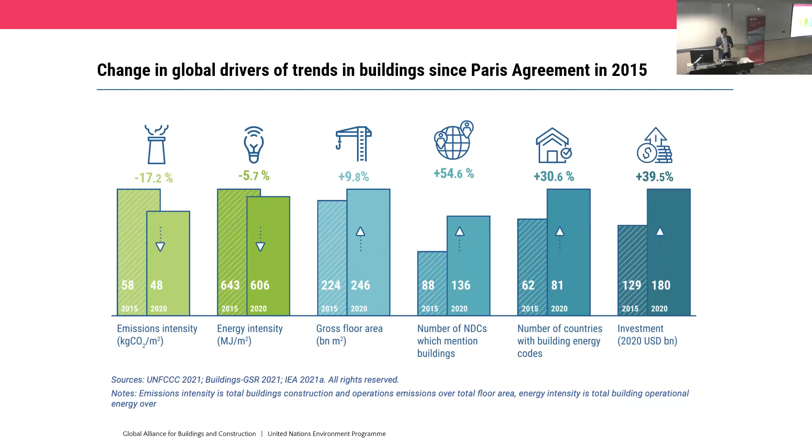We're building more buildings. We continue to see policies relating to building performance and efficiency being instrumented through things like nationally determined contributions, the number of countries with building energy codes, and how we're investing. These are important indicators of interest in ensuring buildings are built to a better standard in the future, but it's nowhere near enough.

The reason buildings are so important is because they comprise probably around 36% or more of the energy use in the world, and around 37% of the emissions. That's a substantial amount that needs to be addressed, both directly through the energy used in the boiler downstairs and the gas emitted, but also in the electricity sector. This is all across the world. That's a major, major challenge.

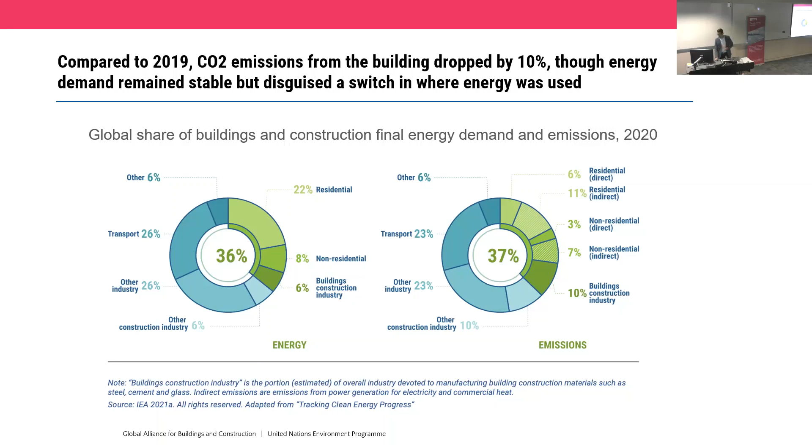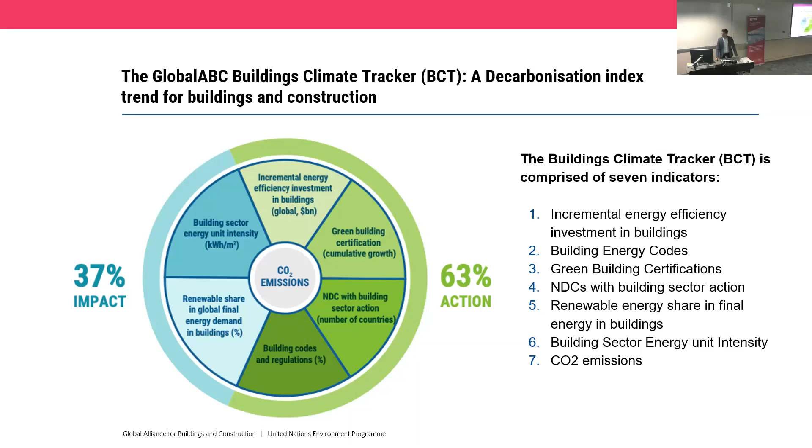When we think about where we need to go, this is really informing the actions we have to be taking around: are we investing enough? Are emissions dropping enough or not at all? Are we building the right type of buildings going forward? This gives an illustration for the last couple of years of how things have been going.

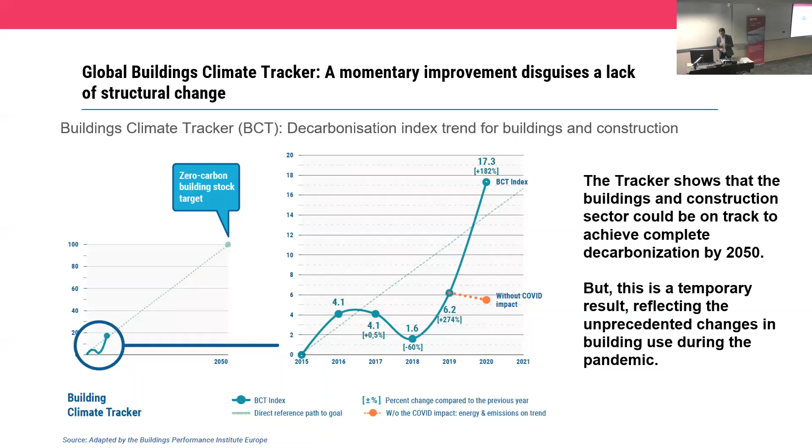So if we're over the line, we're doing on track. If we're below the line, we're not doing so well. And basically, we've not been doing so well. COVID last year, in terms of the indicator, was an anomaly—we probably reduced emissions more quickly than we ever have. It seems unknown at this point whether that curve will be bent down over time, and that's where policy and investments will come in.

When we look at things like building energy codes across the world, which are really critical—I go back to that R2000 home, it's taken the better part of 40 years for that to become the standard code for buildings in Canada. We need to be able to move far more quickly than that. And when you look at how many countries across the world have a mandatory code versus a voluntary code, basically the policies that regulate how we construct, and what we construct, need to move more quickly.

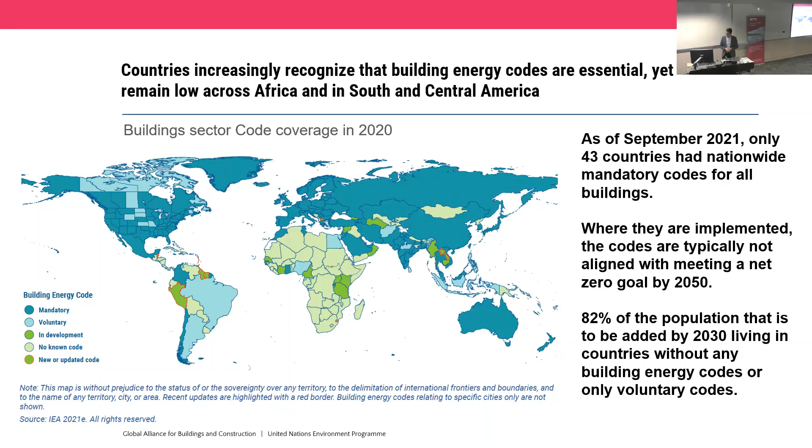None of them are zero energy quite yet. They're headed that way for some few number of countries, but for the most part we're well off track. And if you look forward to estimates of where the world's population will be growing, the reality is much of that will take place in countries with no energy performance code, meaning buildings and their emissions and demands for energy will continue to grow more over time.

This is an incredibly challenging issue, because in order to build buildings that are meeting zero carbon, we're going to be doing so in countries that at the moment have real resource and economic concerns, as well as social ones that maybe don't make this a priority. So we have this to contend with.

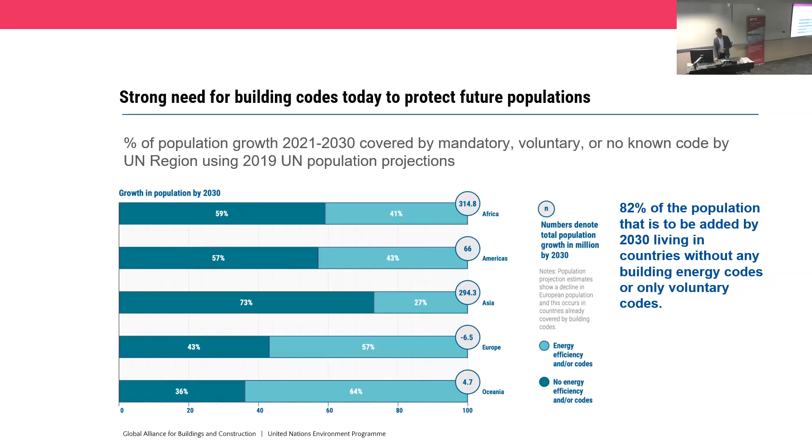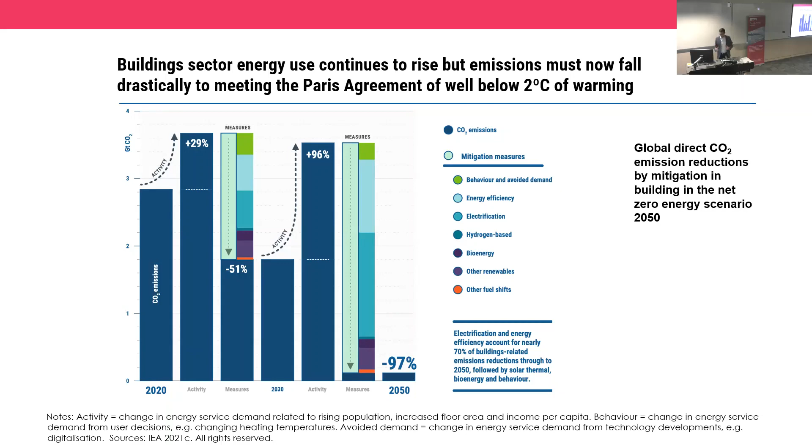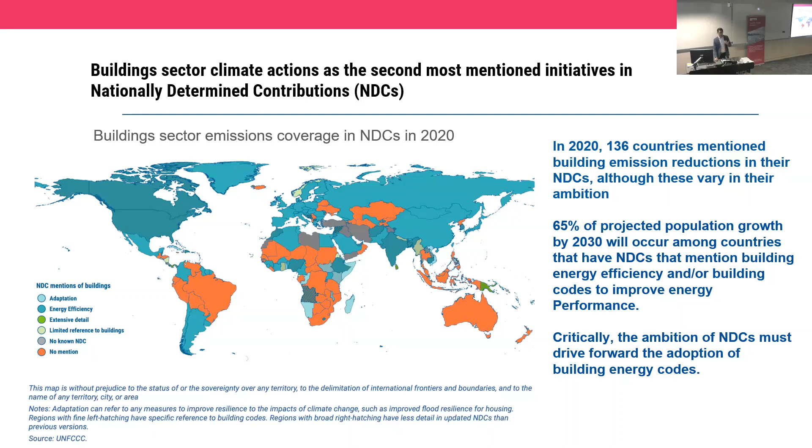So it's a problem that has a high level of concern, but the problem is how are we going to do that? A lot of the work I focused on very early on, as I mentioned, those large databases, were trying to build some way of looking across that landscape and understanding buildings in real use—knowing that as a stock, as a population of buildings, because they're diverse. You can see that in this image.

So one of the reasons why we want to change this current approach is because we have committed to significantly reducing energy use and emissions. That needs to improve the intensity. Much of this is coming from the fact that buildings are such a substantial amount of our emissions. And the fact is it's going to be an investment of trillions of dollars, and therefore we need to do so with care. At times of both economic crisis and energy crisis, we need to be careful with the way we spend money, and we need to target it effectively.

So our history of this is that we're very good at studying the single building.

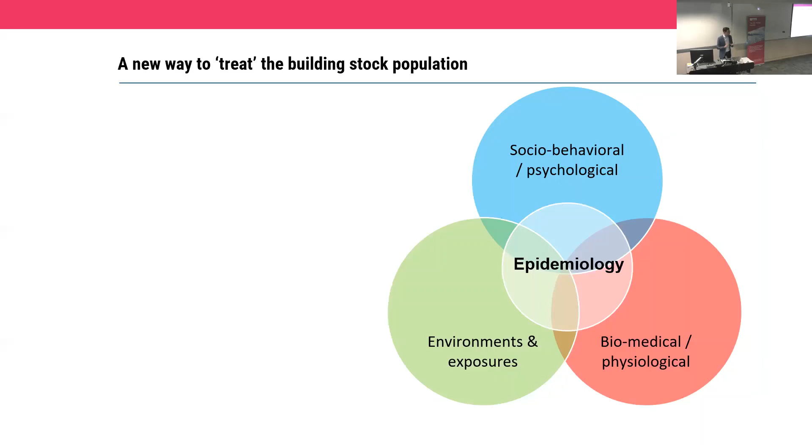So in epidemiology, there's a socio-behavioral, psychological component, basically the behaviors. We have the biomedical and physiological component, which is really the system, the physiology of the individual. And then we have the environments and exposures that those individuals are in. Epidemiology as a method looks across all of those together.

So it's data-driven, which is incredibly important. We need to make sure we're measuring and really understanding the things that are changing. It looks at how spread and severity is experienced - over the last number of years, we know more about epidemiology as a general public than we ever thought we would, probably ever wanted to. We can look at the spread and severity of a condition, whether that's ill health or, in the case of the built environment, energy use among buildings.

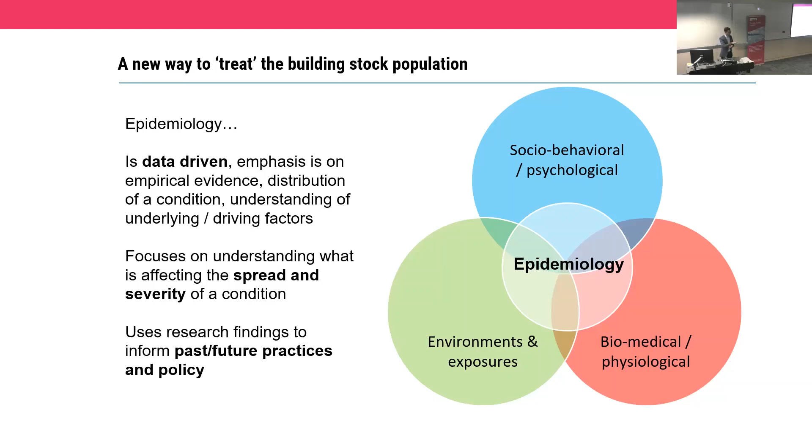Really it's about evaluating what's the current issue that we have, how do we treat that issue, how do we move from this state to another state. In the case of the built environment, from the current energy intensive state and high emissions to one which is low.

Unknown how that happened with cholera - it was the only individual death, and it was because one of her house servants was sent down to get water from this particular well that she liked so much the flavor of. Little did she know. But the point is that it's about investigating phenomena on the ground.

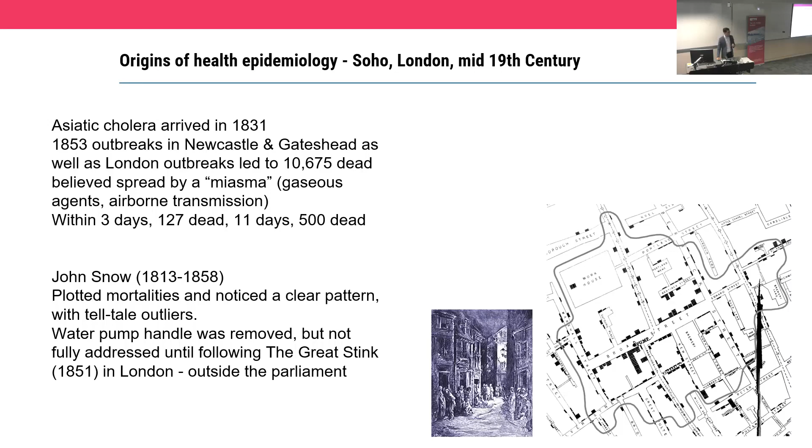It's about tracking these changes over time and trying to come up with proposals around understanding them. So energy epidemiology, an area I've worked with colleagues to develop, was basically the study of what is upon the people, but in this case, the building stock. It's about the systematic study of distributions, of patterns of energy use, and looking at their causes and influences in the population.

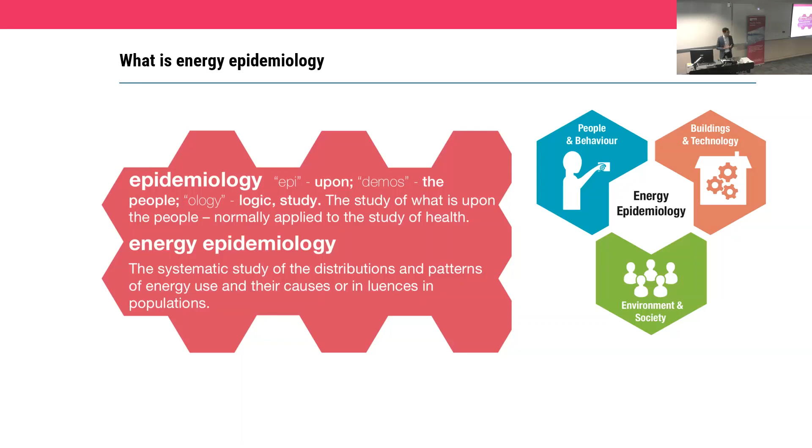So we can think of it the same way. We have people and behavior, we have buildings and technologies, we have environments and societies, and together we can look at that through a lens of energy epidemiology.

One of the things we think of in using this approach is we can have a more interdisciplinary research method, which is incredibly important for bringing in insights. We can look at large scale studies and begin to look at the factors affecting the prevalence - in other words, how frequent something is and how common its change is.

We can look at this using empirically measured data. There's things like data protocols, so being able to standardize how we do this and report it is really important for building an evidence base, and getting feedback. Because one thing we know is we can certainly invest lots of money, we can certainly make changes to things, but do we know if they work? Does that inform the policy around how it is that we need to further adapt our built environment?

And ultimately, this needs to be communicated with researchers across a variety of fields and policymakers. So I'm not going to dwell too much on this, but the idea is that it brings together a concept of population-based methods to look at how we can shift towards a low-carbon society, built environment.

I've got an example of this using the data, and I should also give a mention to Simon Elam, who was quite instrumental in helping Harry and colleagues pull all this together as a data source, through what was known as the Homes Energy Efficiency Database.

The opportunity we took in working with the UK government was: let's take all these data points around houses, their energy performance, the features of retrofits that have been part of a government program scheme, all the gas and electricity meter data that all of these homes have, and pull them together into a giant database.

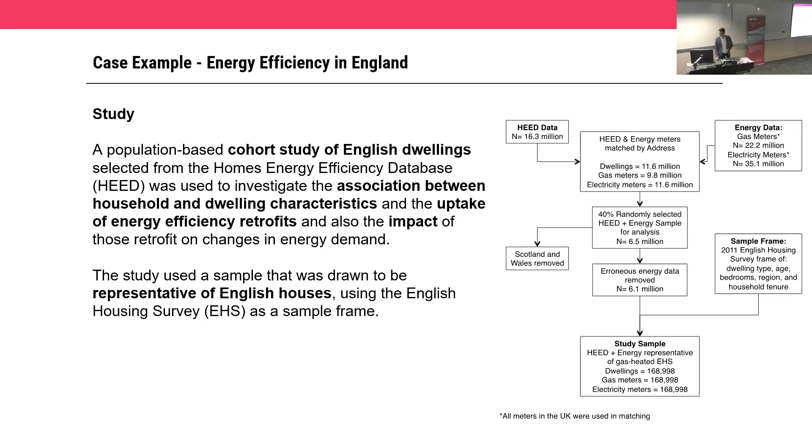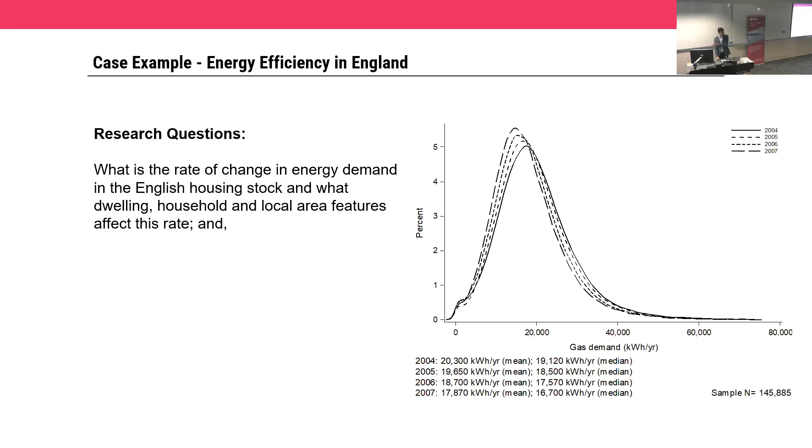The other question we can ask about this sort of data was, well, how impactful were all these measures that we've been investing in? And what impact did they have on energy demand?

Using this method, we're able to say, look, we can take hundreds of thousands of homes and we can know that not every home is going to be the same in terms of how people use them, but across this distribution, how much energy is being saved.

The other thing we can do is ask, well, what happens if you add things in? Because we need to do packages of retrofits, not just one-offs. Do we save more energy as we go? The answer is, well, yes, but it does seem that there's going to be, on one hand, a limit.

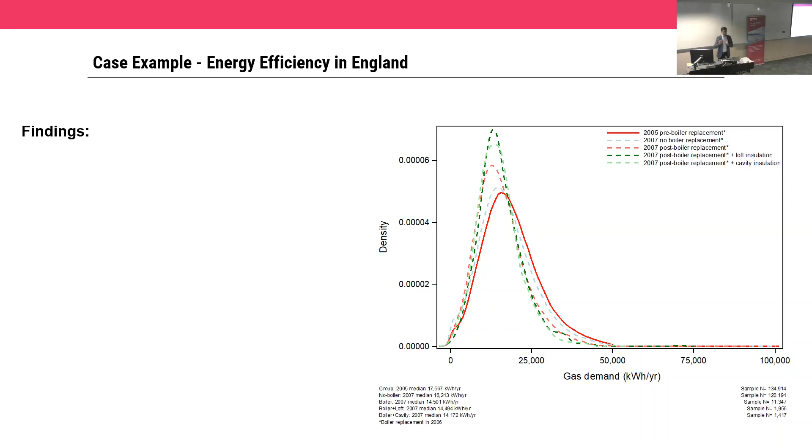But also, there are those who are saving a lot on one end of the distribution, and those who are saving not so much. It's about being able to understand, yes, these things combine, but they don't combine in quite the same way our models would have suggested.

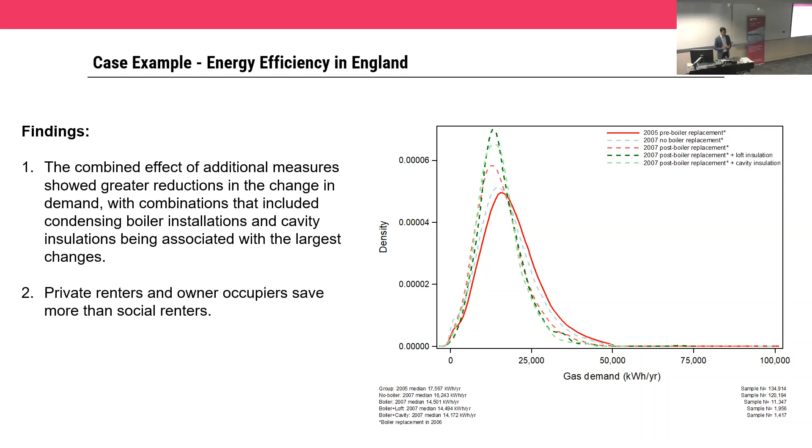We know that there's going to be differences among those who are occupying the home, whether they are, say, private renters, owner-occupiers, or social renters. There's going to be differences in the needs that they have for energy in their home, and that's going to be reflected in the savings that they might experience.

We also know that as a result of socioeconomic backgrounds, that's going to also affect how much energy savings might happen. When we look at income levels, the homes in middle and higher income save more energy than those in lower income neighborhoods. The reason is because unmet needs for lower income means that they can now, in a more efficient home, be warmer, use the boiler more, etc.

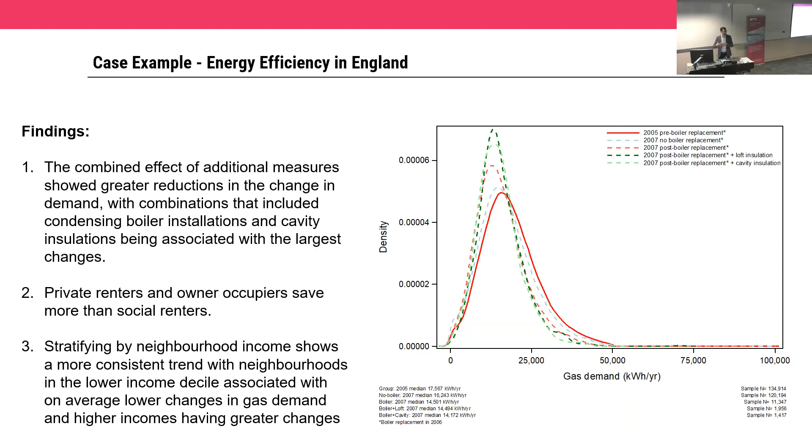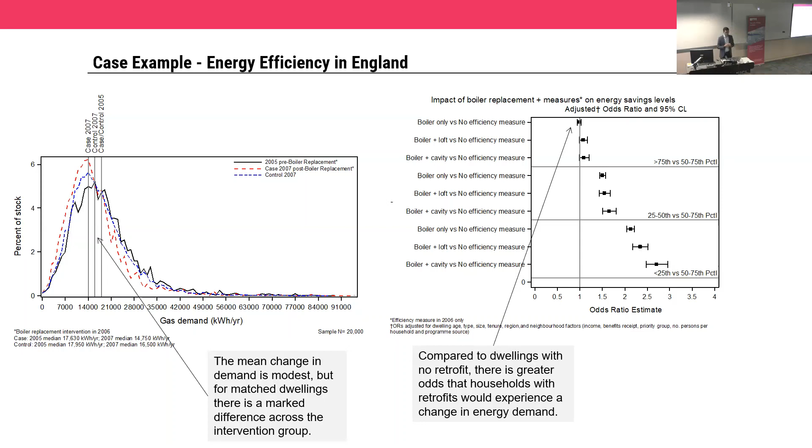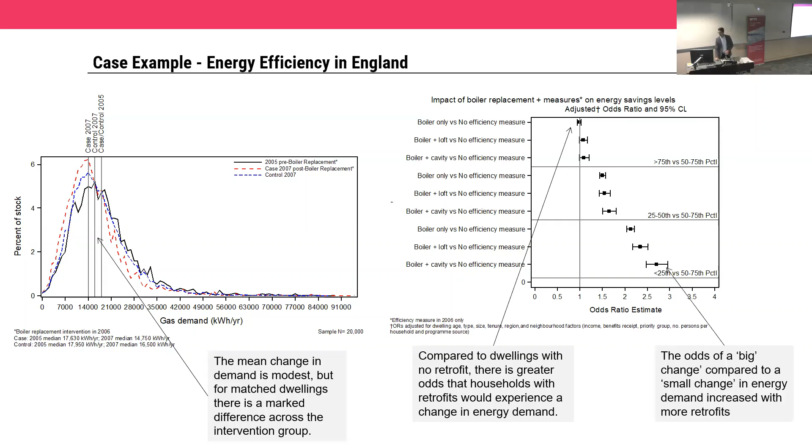It's all right. You've made it here.

So what do we need to do to reach these goals of 2030 or 2050? It's really about this middle group - we need to squeeze that middle group. The efforts we need to make around potential energy savings, what types of boilers, what type of heating and insulation, needs to be attuned to that. The reality is it's this middle group who are least directed in terms of policy, because the implication is they should be able to pay their own investment in efficiencies, but there aren't necessarily inducements for that to happen at the moment.

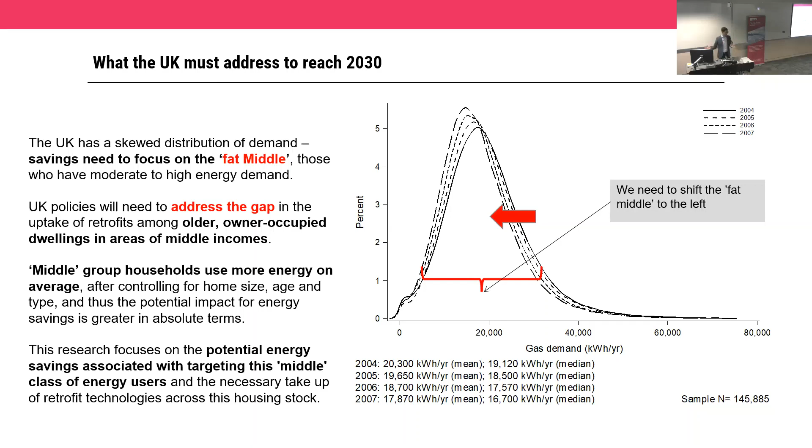Whereas on the left-hand side, we don't necessarily want people to use less energy than they should in order to meet their needs. The policies right now, through government programs, are rightly directed towards those who need assistance. But there's not a lot of policy directed at the bulk of energy users within the building stock in the UK. If we took the findings from that other study and applied them to all eligible homes in the UK, we would save about 10% of the annual energy demand. So it's not a lot - we need to get better at how we're delivering that treatment.

Because one of the things health analysis offers is we can think about an intervention in two ways. The intervention - the boiler, the loft insulation, whatever it might be - can be done, and it can be not very well done. Or in the way it's delivered - is it hitting the right target group, is it being taken up by the households that need it? It's really about the delivery and the mechanism of delivery. Both need to work.

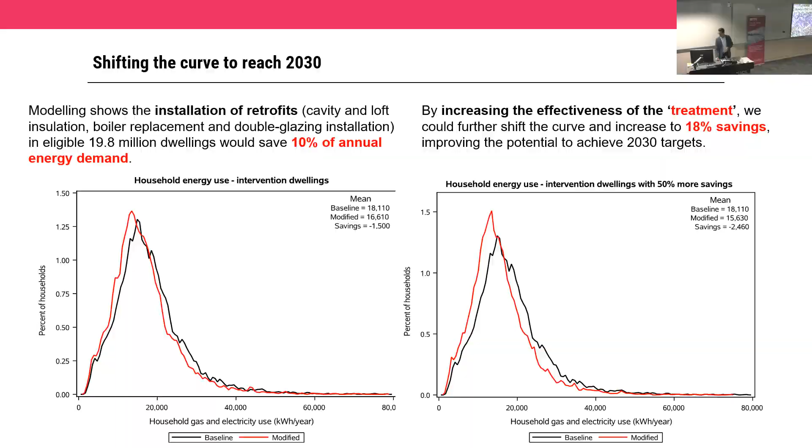So, like I mentioned before, energy savings is great, but really who cares? That doesn't actually solve anything people are wanting. The fact that you use less gas isn't really about the gas - it's about saving money, pardon me. It's about can my home be warmer, and is it more valuable? These are the questions when we look at creating a more efficient building stock. It's really about sustainability, health and many other things. This is the nexus idea - we want to decarbonize the building sector, but for a lot of other reasons, not just emissions.

This is something which, very early on in one of the projects I came in to work on - actually might have been the first, with Mike and Paul Wilkinson - was looking at the relationship between these mitigation actions in buildings and health. So we might improve a building's heat loss, reduce how much air leakage it has. And so then what? By the end of this hour of me talking, there's going to be more CO2 in this room - you can get a little bit sleepier unless it's well ventilated. That might happen, it's okay, I've lectured for a long time now, people fall asleep in classes. But it'll be related to ventilation and the quality of the building, and all the different things we do in buildings that can create indoor air pollution.

Here we're looking at things like indoor sources: particulates that come from cooking, volatile organic compounds from furniture, smoking indoors, or natural gases like radon coming up through the ground into homes. If you seal that up and make it more airtight and warmer, great, but without ventilation, you're going to increase the amount of exposure you have to all these pollutants.

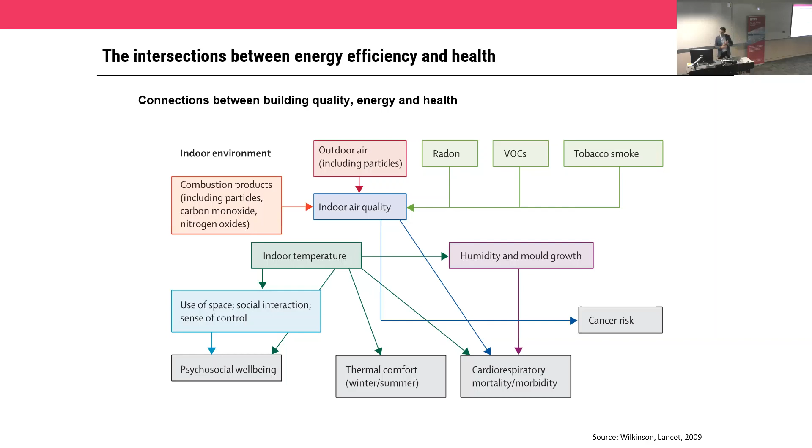So we need to do these measures carefully. We have to understand what the implications will be for health. The fact is that we do spend the majority of our time indoors, and as a result, buildings can have a substantial influence on our health and well-being. This comes through a variety of means, such as the thermal environment - what's the temperature indoors, what's the amount of air pollution I get exposed to.

So when we look at, for example, this study we did on radon exposure in houses across the UK as a modeling activity - radon, which is the second leading cause of lung cancer in the UK. It's off by a long way from smoking, but it is an important determinant of lung cancer, and it's not something you want to expose yourself to. Where does it come from? It comes up naturally from the ground and is present in certain parts of the country more than others.

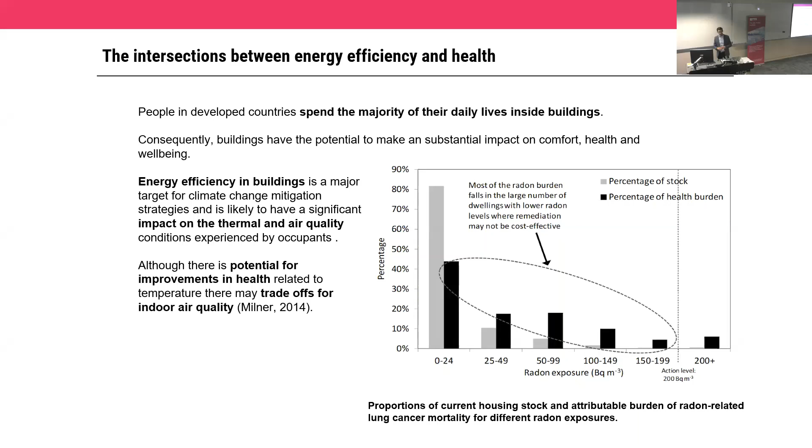But it's not the high concentration areas, which are known and targeted with government actions, that are the issue. It's actually all these other areas that are low dose, but they accumulate over a long period of time. And when we retrofit a home, what's the implication going to be?

We did this study and were able to work with colleagues at Public Health England to bring together a database of about 500,000 radon measurements. We connected that into this database we had helped construct, home energy efficiency. We looked at all the radon measurements and the energy performance, and asked the question: what's the relationship between energy performance - a more well-insulated and more airtight home - and this naturally occurring gas which can cause lung cancer, which you don't really want to have around in your home?

Basically, at the moment, it appears that more insulated, more efficient houses will have a higher radon level indoors. The reasoning is because most of them are not in a high radon action area, so there's not a mitigation effort to go and remove those radon emissions.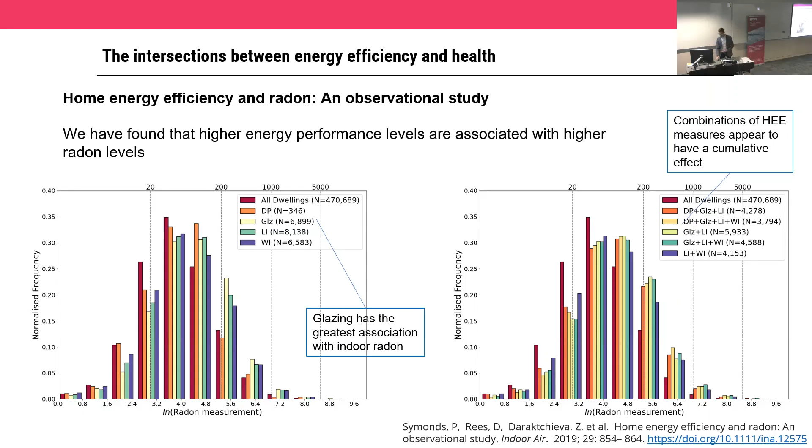When we look at all these things built together, the concern is that we continue to increase the radon concentrations. So this affects our health. This is something we need to do for energy purposes, but we need to do it carefully.

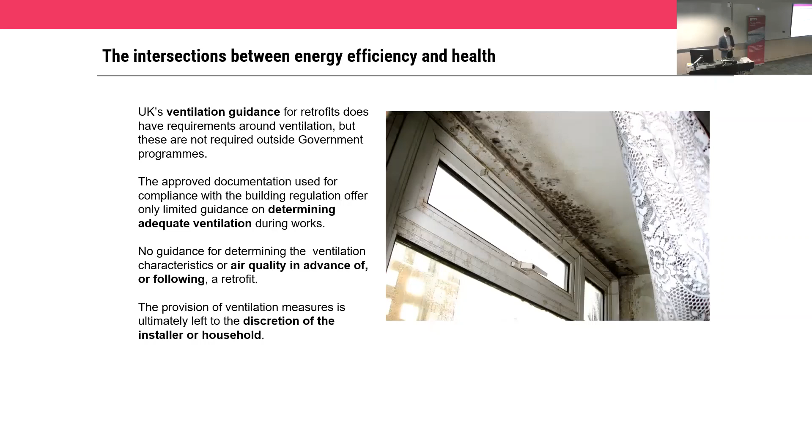Part of the problem is that we don't have a lot of good guidance. How is it that installers can go through and improve a building without causing harm? If you're part of a government scheme, there is documentation that needs to be used. But for the most part, most work is going to be done by builders who may not be required to follow those, and they're going to use their own judgment. It's important to understand how that process works, but we also need to ensure they're aware of these risks.

The other issue we might look at is temperature in homes. This is important because of the rising cost of energy - yes, recent changes mean it's going to be maybe a little less impactful than previously, but to protect ourselves from winter is to have a warm home.

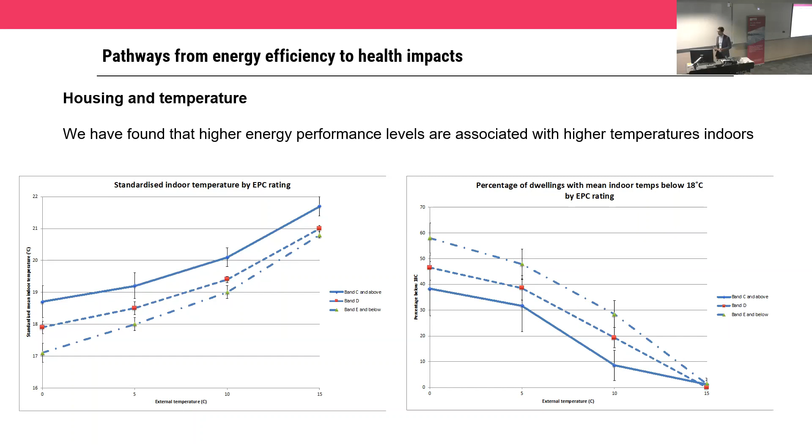We also find that when it's cold outdoors, these homes are performing much better in terms of keeping a warmer indoor environment. So a lot of this work comes from these large data sets.

But there's some peculiarities here. This is some work we did with the Health Survey for England, looking at the association between indoor temperature and self-reported health. Surely warmer homes are healthier homes. Well, in this study, we found that warmer homes were actually associated more with people who have more ill health.

And we questioned, well, why might that be the case? So this is where digging into what might be happening comes in. Is it that people living with disability and illness are advised to keep a warmer home? We know that for a number of diseases relating to self-reported ill health, you're given guidance from the NHS.

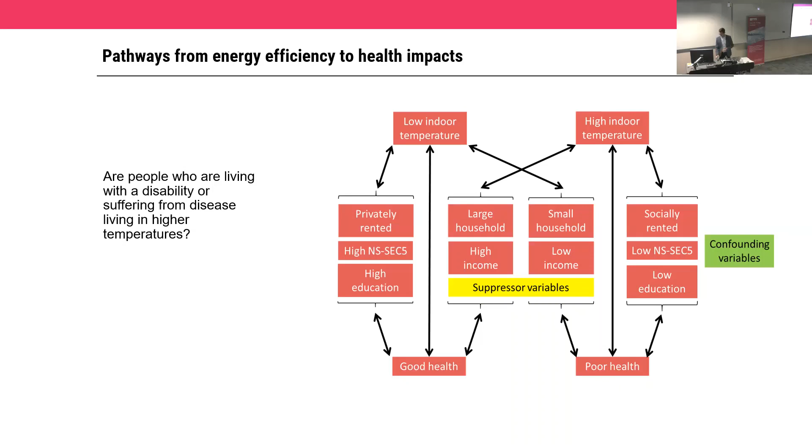Or is it the type of home you live in? Are certain older people living in certain types of homes more prone to these diseases, being impacted in different ways? So the concern really is to make sure we understand what's creating that determination. Is it the built environment? Is it personal behavior and choices? What's causing or potentially leading towards risk of ill health? We need to be able to dig into and understand what the mechanisms are.

So we might do this through complicated models. I'm not going to dwell on this, but basically we can do these types of studies. These studies have lots of data behind them in terms of the relationship that exists between performance and temperature, like I was showing before.

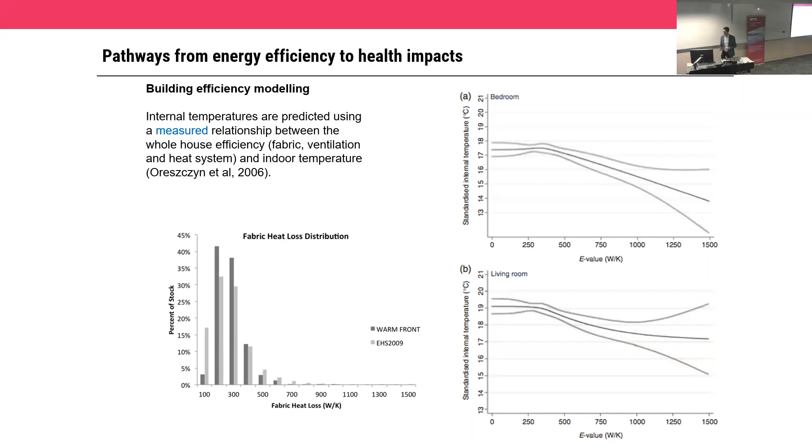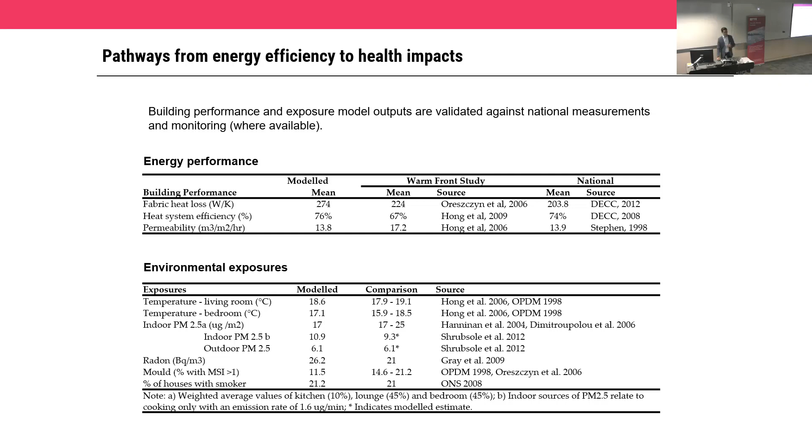And we build all these things together, which, with colleagues across several institutes here, LSHTM, and IEDE, we spent a lot of time looking at the evidence to try and pull together an understanding of what impact improving buildings could have on different diseases, whether that's cardiovascular mortality, stroke, lung cancer, etc. If we do all these things, can we show how impactful this will be on health?

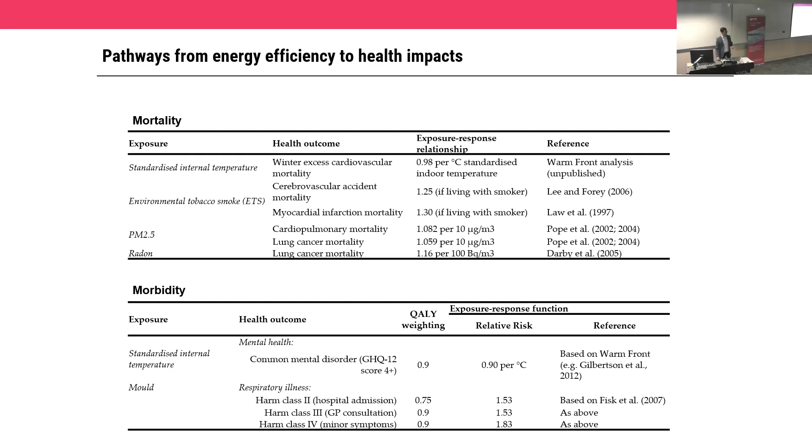And the type of research we were doing here is saying, let's take all the buildings in the UK and make them more efficient. What might that mean in terms of health? And if we don't pay attention to ventilation, the risk is that we can create health harms. We want to avoid that.

So we need to make sure that when we do the retrofits we're talking about, we pay attention to ventilation in particular, but also ensure that installers understand these risks as well as homeowners.

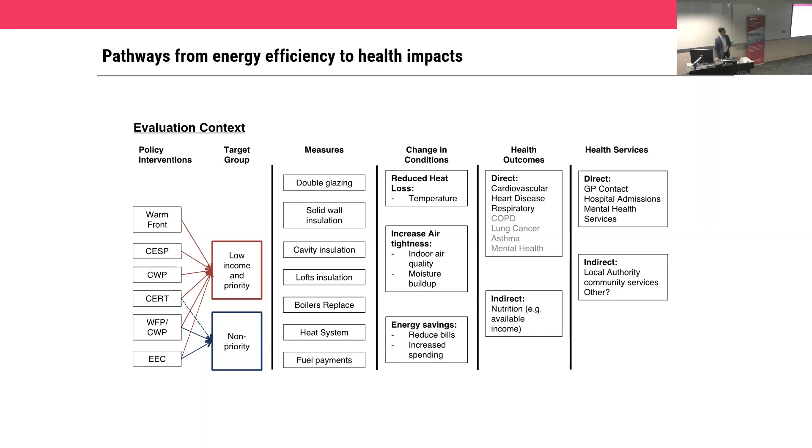So we're working now with some big data sets, looking much more into the health angle. We want to understand more about the relationships between a lot of these measures and interventions and specific health outcomes. So we're working with colleagues in UCL epidemiology.

We're going to be pulling together large data sets, a survey of aging, a survey of health, the home energy efficiency and national energy efficiency databases, bringing them all together to ask: do interventions offer an opportunity to protect health? And which ones do or don't? So we can better evaluate the impact of those programs.

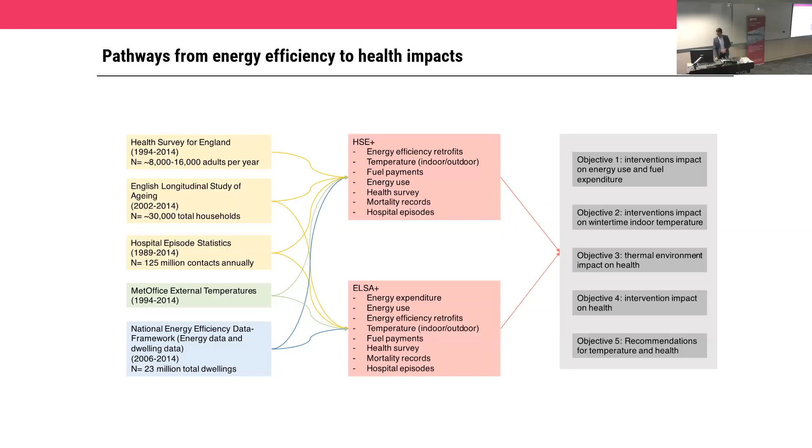One thing I'll very briefly touch on, because it's taken up a lot of my life in different forms, is the Lancet Countdown on Health and Climate Change. Looking across the variety of interactions I've been involved in, this is another area that intersects between health and climate change and the built environment, in particular my interests. But really the importance of the work I'm conducting with my colleagues is that we have a finite amount of time to address a big challenge.

And this transformation we need to take place is happening today. These are just the main messages from that Lancet Countdown report from last year, which was basically: we're not doing what we need to be doing as quickly as we can. The implications this is going to have on our health are happening now. And ultimately, if we roll out the same way we've addressed things like COVID, with great inequities, we're not going to be supporting a healthier outcome.

We clearly don't have that long. We also know that there's going to be a relationship between fuel use and health that I mentioned before—particulates—and the performance of buildings, how much fuel we use.

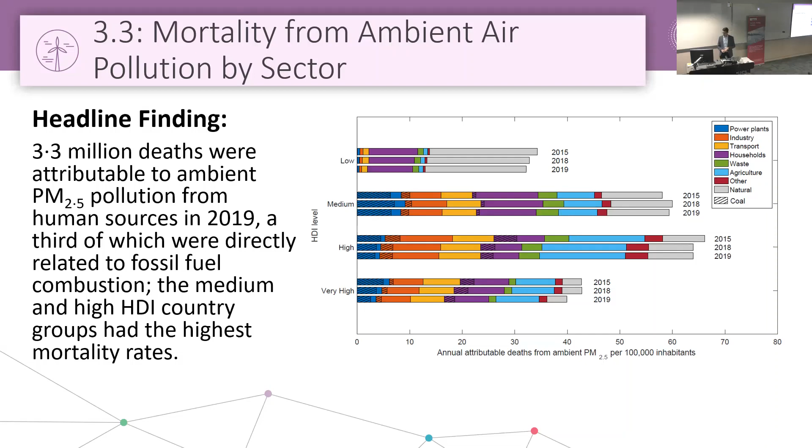A lot of this across the world is going to be from sources that are not gas and electricity, and they have a higher risk of concentrations of particulates and mortality related to that. We see that here, which is basically the energy sector working with colleagues in Austria to map out and show the implications of the energy sector on air pollution. A lot of this is coming from power, homes, transport, etc. So seeing these shift as quickly as possible.

And then again, when we look at other sources of emissions that impact on our health, things like diet—this isn't an area that I work in, but it's an important one that we need to consider. Also looking at healthcare sector emissions, being able to say, look, across the sectors, the built environment etc., being able to deliver health services in a low carbon fashion is critical.

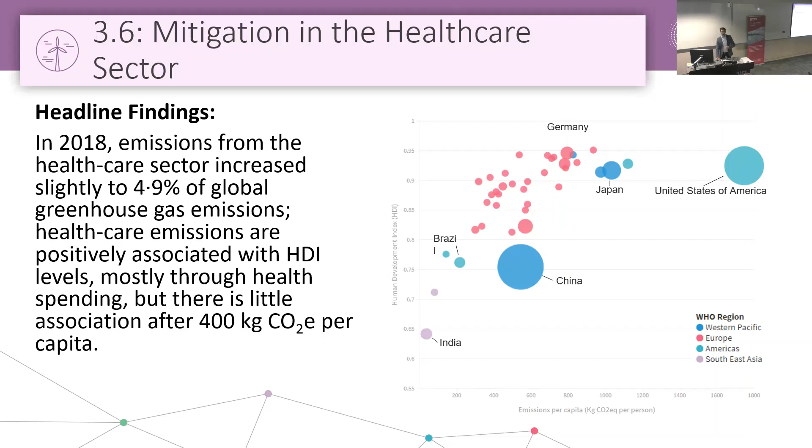How is it that we're going to achieve things like SDG 3, which is health for all, in a way that's very carbon intense? We can't do that in the same way. We have to reformulate how the NHS, for example, is delivering in a zero carbon form.

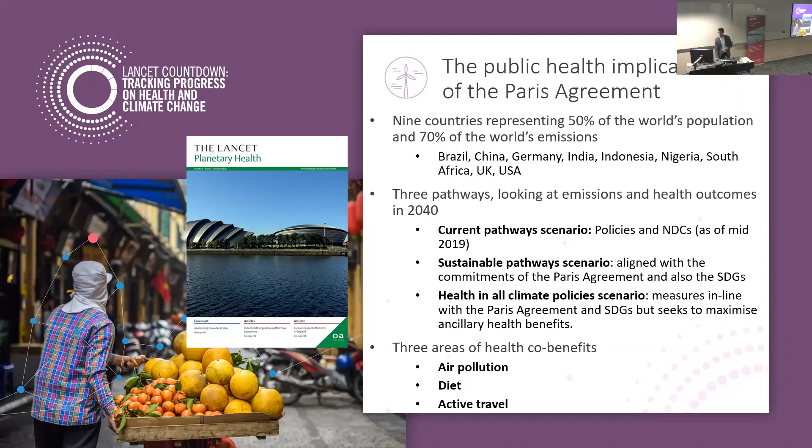So we did some work, and this is again something that says, well, what happens if the world decides to meet its Paris agreements through its nationally determined contributions? What happens if we were to start putting in place not only policies that were good for emission reduction, but also good for health? And so we can look at that in terms of air pollution, diet, and active travel.

Basically to say, okay, we can reduce emissions, that's great, but the implications are we can really have some real benefit to our health by cycling more, having infrastructure that supports walking and cycling in cities, by reducing the amount of air pollution coming from a variety of fuels, electrification etc., and by having healthier diets. These things all make a big impact on emissions, but they also will make a big impact on our health.

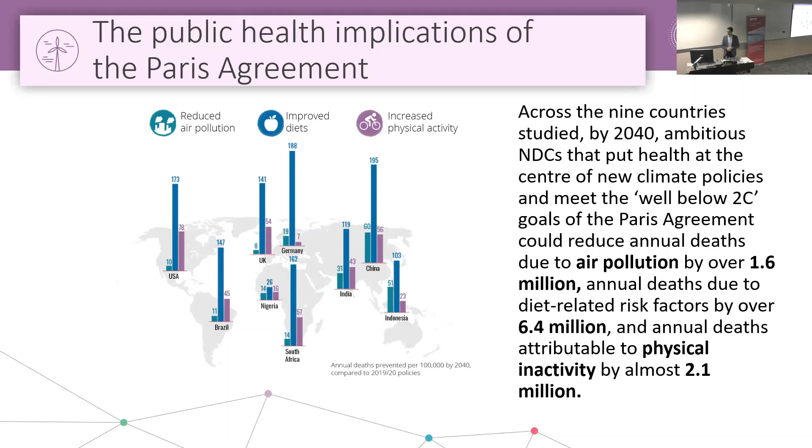I'm going to skip over that for a second because I just want to get a little bit further along, but basically saying, by using an approach where we start with data, where we look at interventions and impacts, we can translate that through to policies that say these are going to be actions that can help protect our health, reduce emissions, create healthier environments, and that moves towards more reasons to undertake these efforts.

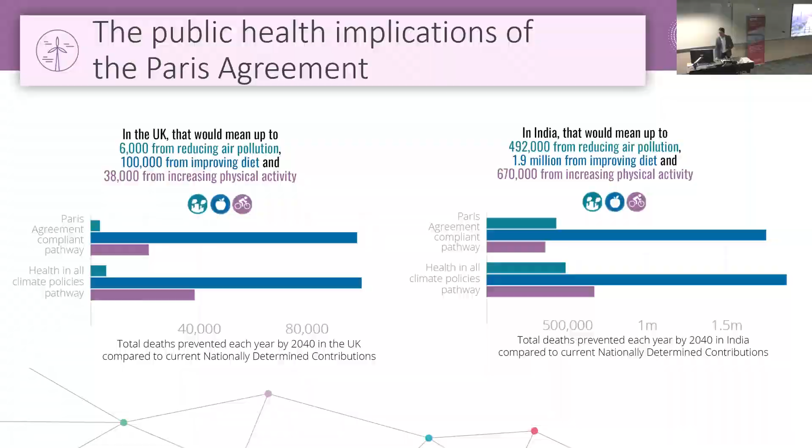So where am I going to be going next with these types of issues? Well, the idea of being able to look at sustainability more holistically through this intersectional approach—basically looking at how we have climate mitigation and adaptation actions that we need to bring to the built environment. We need to look across a variety of dimensions as it relates to health.

An area of work that I hadn't mentioned, but working with colleagues on around energy and gender, looking at cities, looking at the energy sector, and these all need to be transformed so that we're looking at improving our processes, looking at where innovations and technologies can be adopted more readily, how our current practice evolves over time, and that ultimately we transform these systems to be completely aligned with what we need to see in the Paris Agreement. But they have to be doing these for the reasons of health, of equity, of safer places, etc.

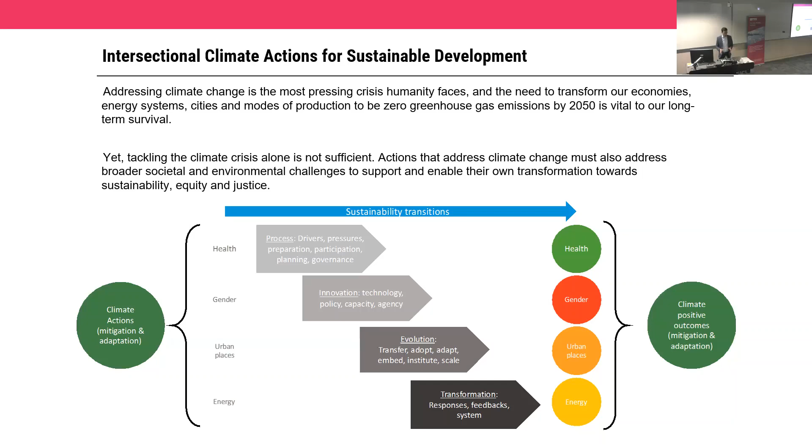So I think this is where, again, I want to try and build more and more into this nexus approach by working across disciplines, something that I've done for a long time, and have found those gaps that we can build more research into. And so really being able to look at building programs of work that support that.

So looking at priority areas, looking at different geographies of scale. One thing I didn't mention was I've worked across many parts of the world, with colleagues there, and it's hugely insightful to look at what the challenges are there. And it's very inspiring for work that we might do in the UK.

So being able to work with and develop these programs of research to transform towards that sustainable built environment that we so desperately need and that will be good for us. And on that note, thank you very much.